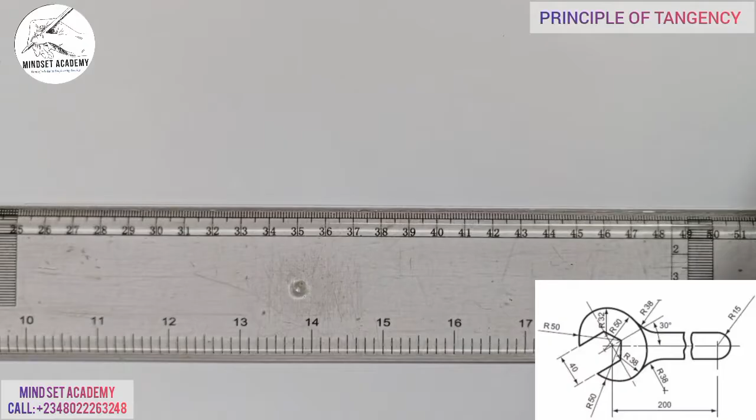Now, the first thing you do is draw your horizontal line in this manner. That is the horizontal line you've drawn.

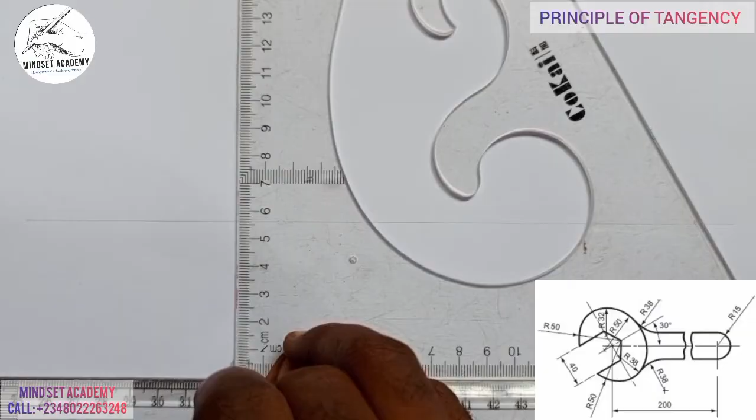And the next thing you're going to do at this end here, you draw your vertical line this way. You can see that? And they are meeting at this point.

Is that thickened? Now, doing that, you discover that this center point you see here is the center point you're seeing on the screen, right?

Now there's another line, this line you're looking at, that is inclined. It is inclined at an angle of 30 degrees to this center line. That is from here to here, given as well 30 degrees.

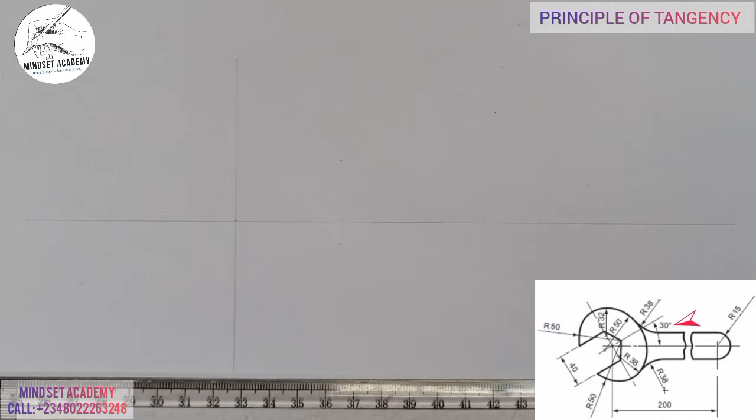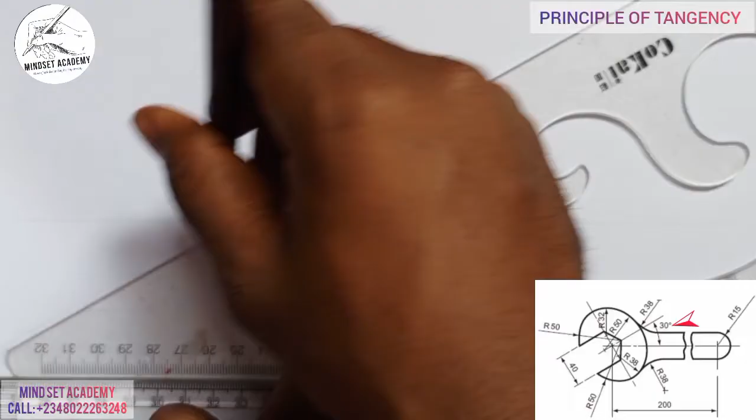And when my t-square and my set square are working together, and my set square is on the t-square in this manner, I'm going to move it because this inclined side, when the t-square is placed in this position, is 30 degrees. And I'm going to move it to that point, and draw an inclined line at an angle of 30 degrees. You can see that?

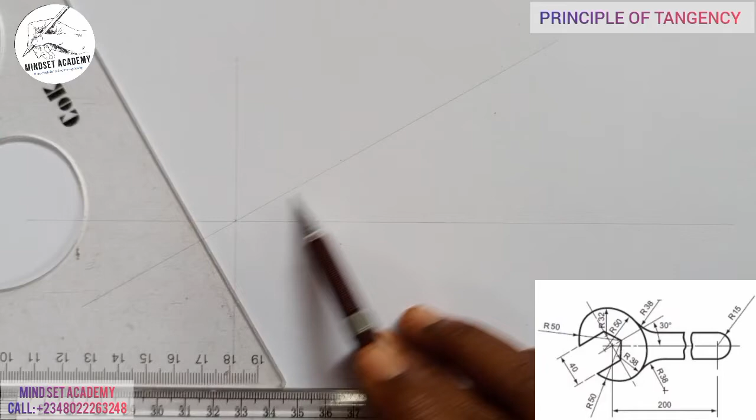Now, at this point here, you see, which will be this line connecting these 2 points here, right? I'm going to draw another line that will be forming 90 degrees with this line I have drawn. So placing it this way, I'll be having this. You can see that? So this point, like I said, is the center point you see here.

Now, why am I drawing this line? It's for me to draw this distance of 40. Is that okay now?

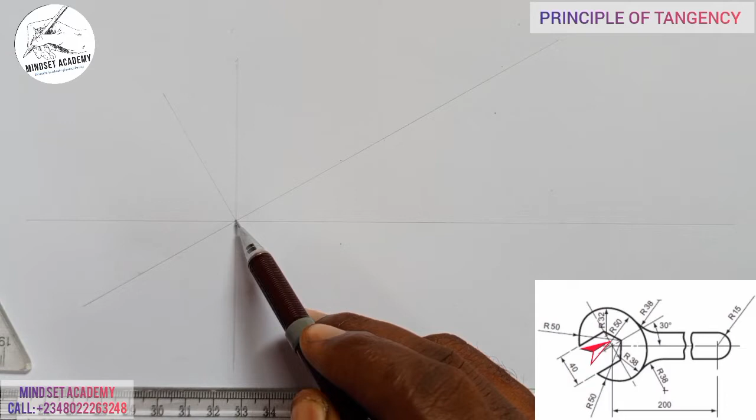So how can I draw the 40? From this center point here, which is that center point you're seeing, I'll measure to the top, which is that top you're seeing, 20, and I'll measure to the bottom, which is this part here you're seeing, 20. That will make us 40.

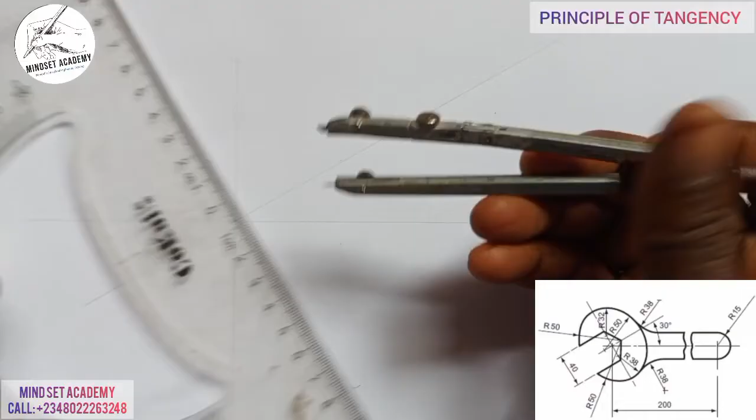So I'll take my compass or my rule, I'll place it at that point, and I just need only 20. So from 0 to here is 20. I see that? And I'll place it at this point. I'm going to mark 20 up here, and I'll mark 20 down here. You can see that? 20 up and 20 down.

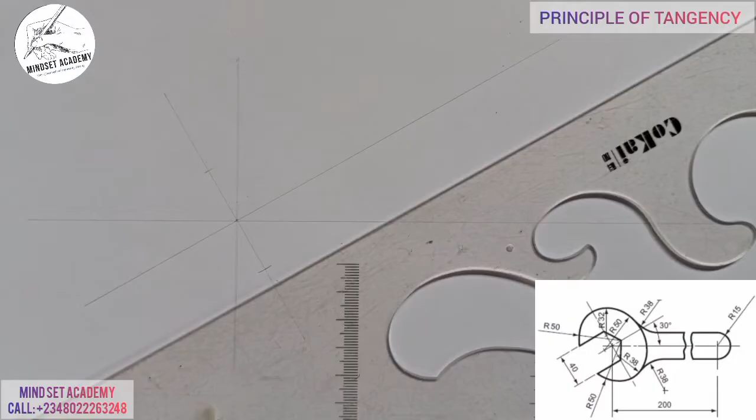So the next thing I'll do is draw a parallel line with this line here. So let me do that. I'll place my set square this way, the one I used to draw this line, right? I'll use it to draw this. So I'll put it this way to get parallel lines.

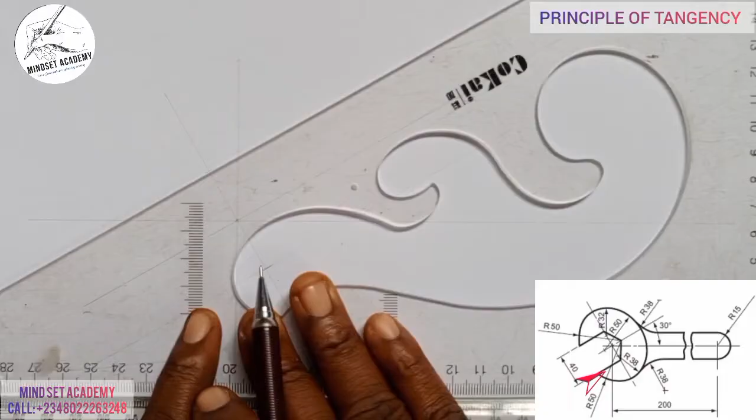I place it this way. I'll draw a line this way. I'll also come up here too. I'll do the same thing this way. Now this is what we have here.

So the next thing we are going to do here is look at this point where this top line meets this horizontal line here. This point you see is that point you're seeing on the screen, right? And there's an arc that is connected to that point, and the radius of the arc is 50 on both sides here and here.

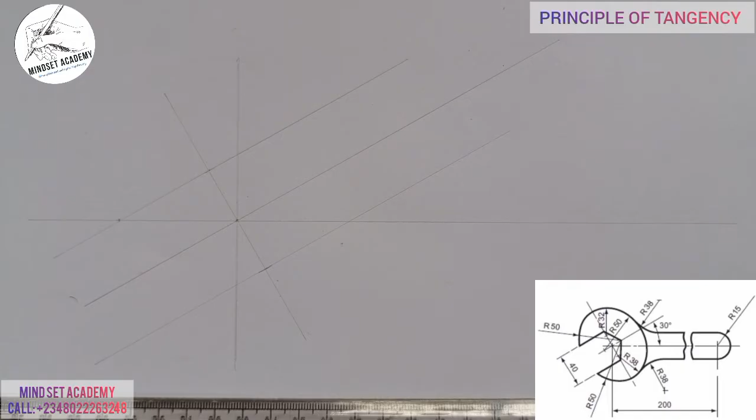So I'm going to take my compass, and I'm going to measure 50 on my meter rule. So when I take my meter rule and place it here, I'll measure 50. So from this point 0 to 5 is going to be 50. And I'll come to that point I was pointing at earlier, which is this.

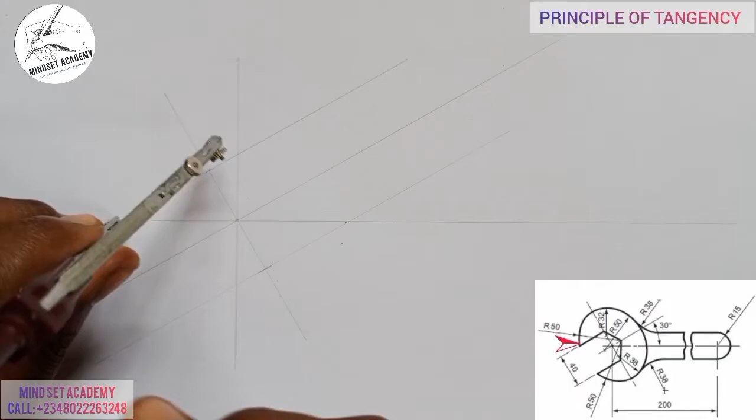And I'm going to mark an arc at this point here. You can see that. So from that arc here, on that point there, I'm going to draw a curve, a faint line, this point and also this point. You can see that. I'll use my faint line.

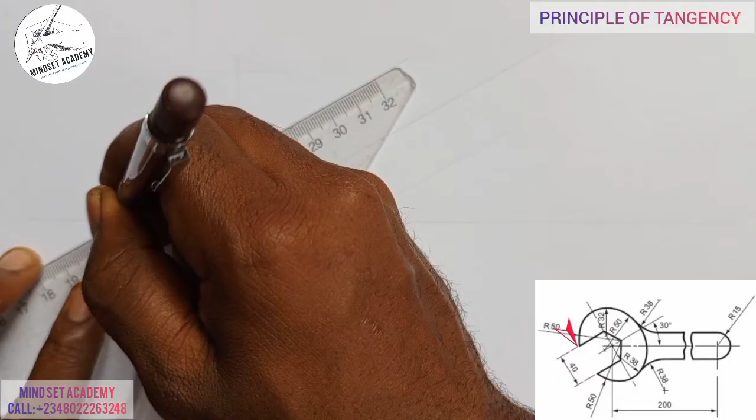So in doing that, I already know to make you understand that we are fully on track. I'm going to tick in this point here, just to give us an insight that we're actually on track, ticking from here to here, and also ticking from here to here, as shown in the diagram above.

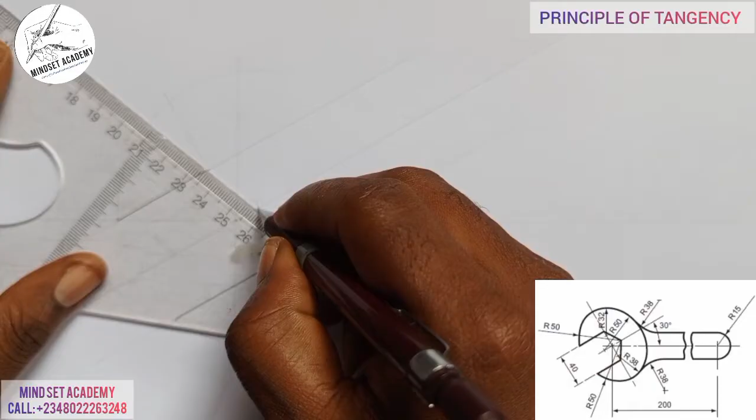That again, and also from this point to this point is this point to this point here, and from this point to this point is also this point to this point here.

So you don't use thick line until you're sure of what you're doing.

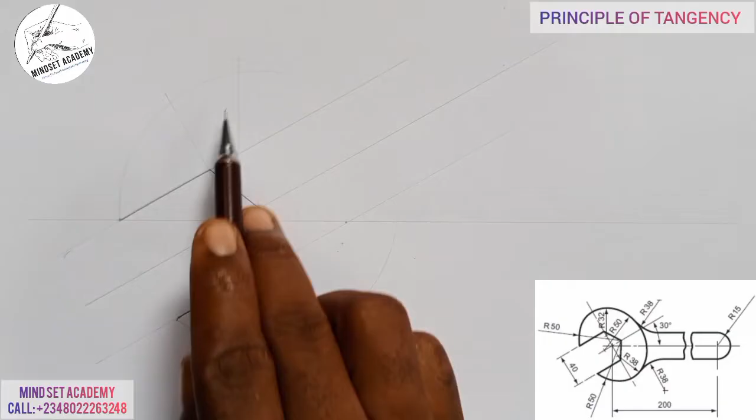The next thing I will do is there's an arc that connects these two arcs, and that arc has a radius of 50 at this side, as you can see on the screen. Look at this 50 connecting this, and also this other one with 38. So let me first do the 50 here.

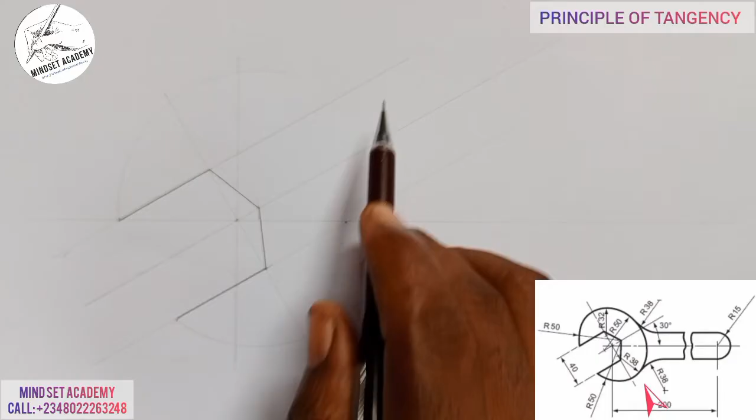Now since it is going outside, whenever the circle is coming outside, it is external. The circle will be external, so you're going to subtract. When you're subtracting, it will be the 50 minus the 32, and that's going to give us 18.

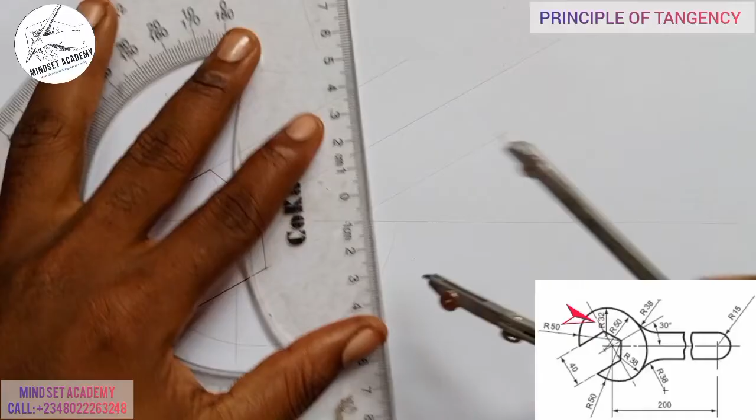So I'm going to measure 18 on my meter rule this way, from 0. This is 10 and this is 18, and I'll place it at this point and strike an arc.

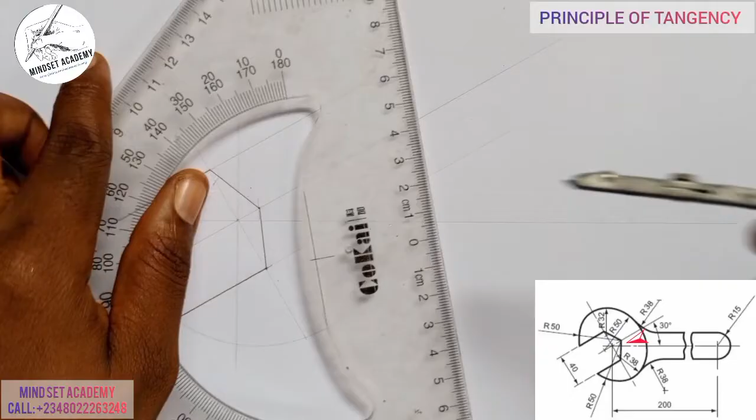Similarly, I'll measure a radius of 32. This 32 you're seeing, measure a radius of 32 on my meter rule in this manner, 30 and this 32. I'll place it at this point where it cuts this line and gauge it until I have a curve that will give me what I want. Just faint line first, you don't use thick line until you're sure of what you're doing.

Now I've done that. Then the other one too, this 50 minus the radius of 38, and that will give us 12.

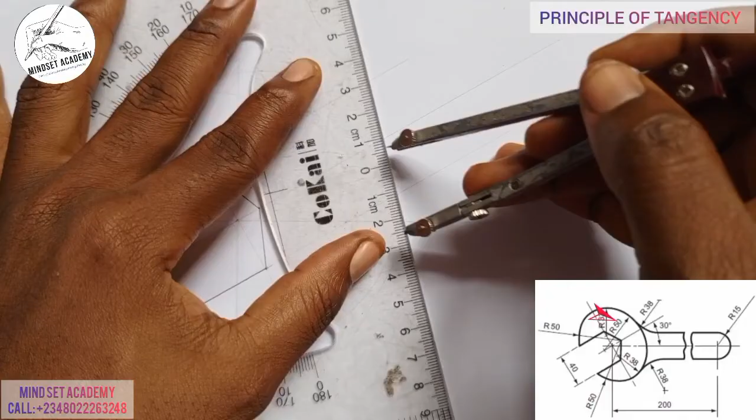So I'm going to measure 32 on my meter rule. From here to this point here is 32, and I'll place it at this point here. I'll strike my arc.

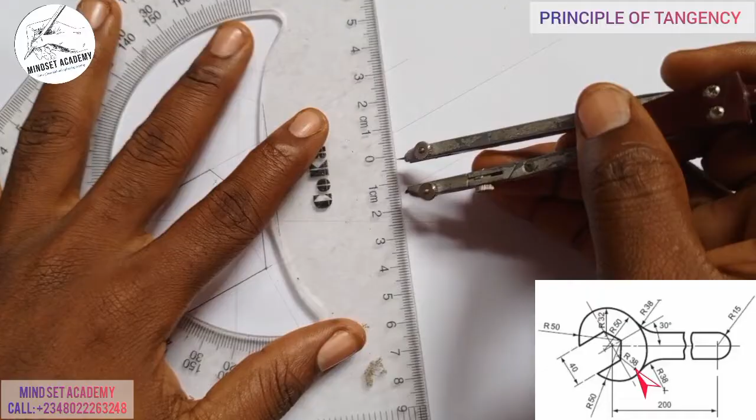So from that point, I'm going to now measure this 38, because this arc is given as 38. So I'll measure 38 on my meter rule again. From here to here is given to be 38, and I'll place it at this point where it meets, and I'm going to draw an arc.

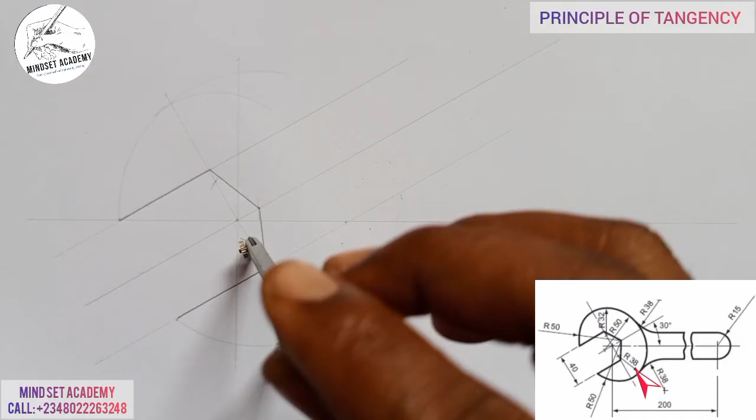I'm going to draw an arc, faint line first. Now the next thing I'm going to do is this.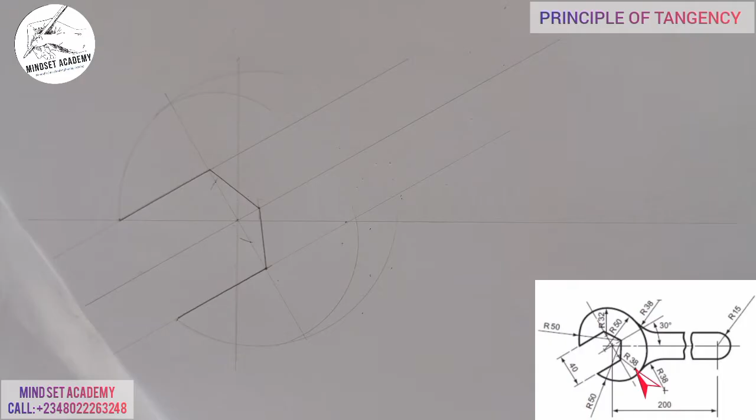I'm going to subtract 32 from this 50 here, because 50 is connected to this 32 and also 50 is connected to 38. So what I'm going to do is mark 50, subtract 32 from 50, and I'll be having 18.

I know very well that when I measured earlier on my meter rule, from this point to this point is 18. You can see that? And I'll place it at this point of 18 and strike an arc.

And I know very well that if I subtract 38 from the same 50, since it's connected to the 50 line, I'll be having 12. And I know earlier when I measured from this point to this point is 12, or you can just easily put in a meter rule. From here to here is 12. I'll place it at this point here and strike another arc.

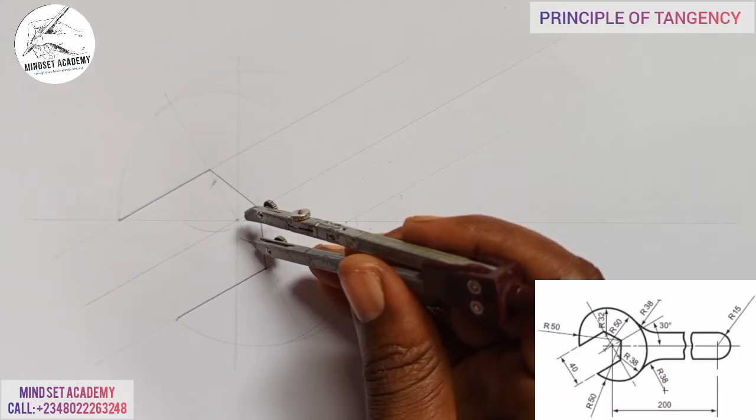So where they meet, I can easily place my compass there and gauge it to that point where they will be connected. So from this point, I can easily thicken it.

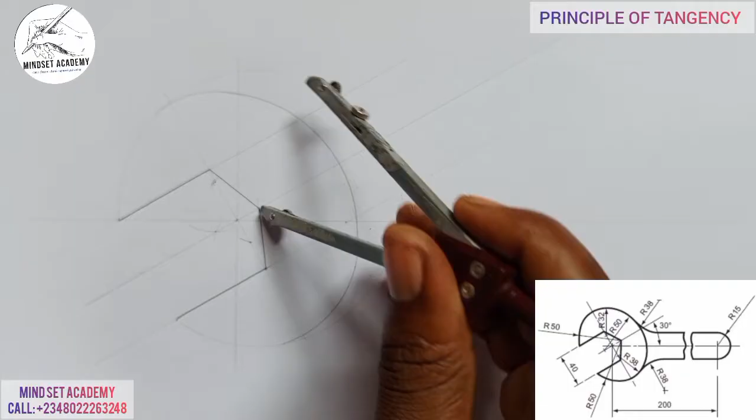And here also I'll thicken this. And here also I'll thicken this. Then this point is giving me this point of 50, which I am going to thicken, and also here too. Now, the next thing I'm going to do here is that

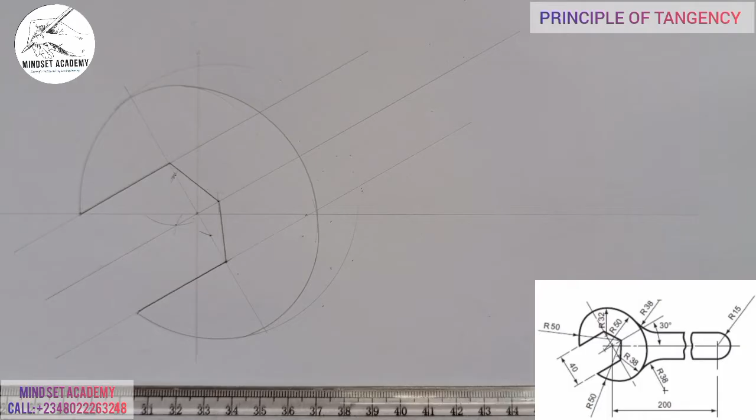I'm going to measure. If you look at this arc that we have here, it has a radius of 38 at both sides, so I'm going to measure that distance of 38. Before that, the thickness of this line here, from here to here, I'll draw a horizontal line this way, and I'm going to measure 15. So that is 30, the radius is 15, so the thickness there is 30. So I'm going to measure 15 on my meter rule.

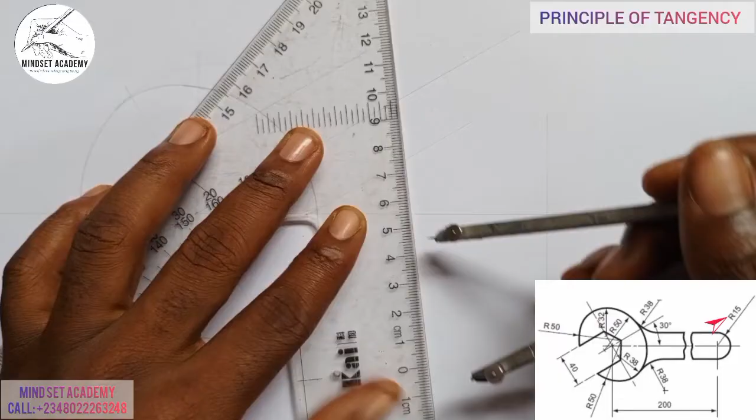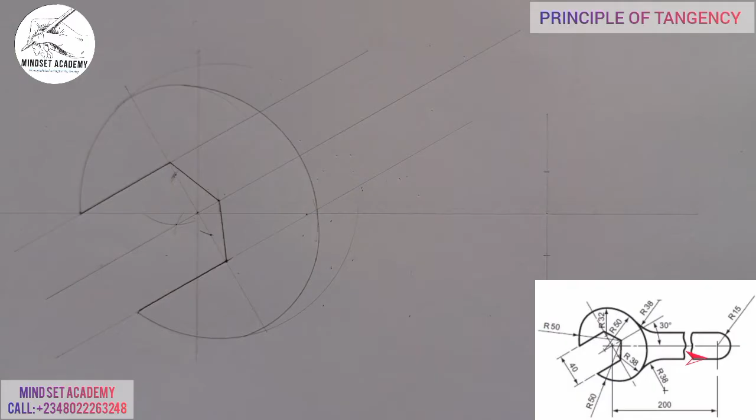I'm going to measure 15 on my meter rule this way, from 0 is 15 to this point here is 15, and I'll place it at that center line here, and I'm going to mark 15 up, 15 down. Then I'll draw my line that will be connected to this point this way. Just draw a horizontal line this way, and also do the same thing at this point here too, this way.

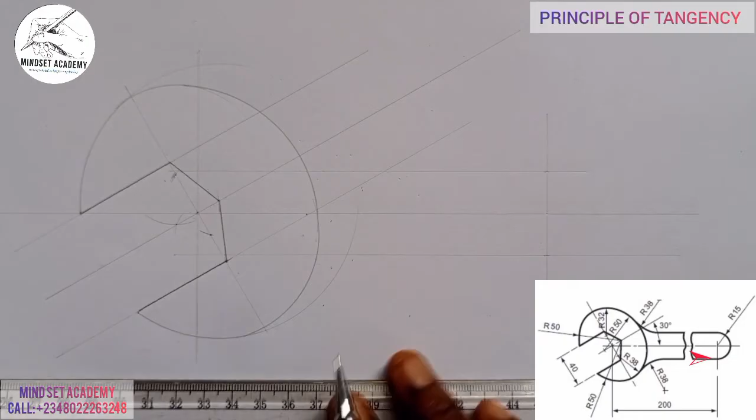Straight line. You can see that? Now we know that from here, the center point here, to where to get this arc you can see on the screen, is given to be 200.

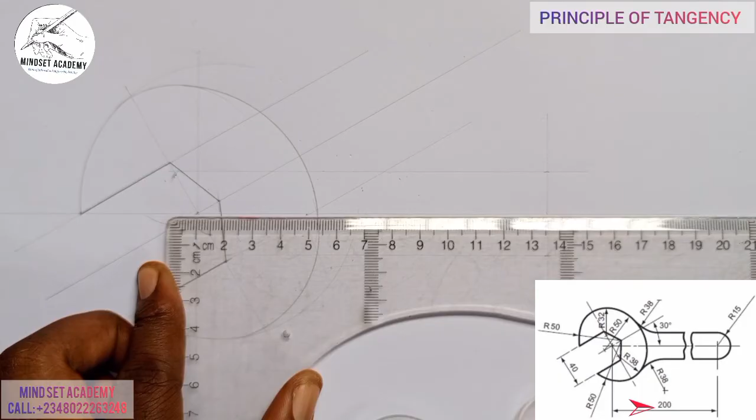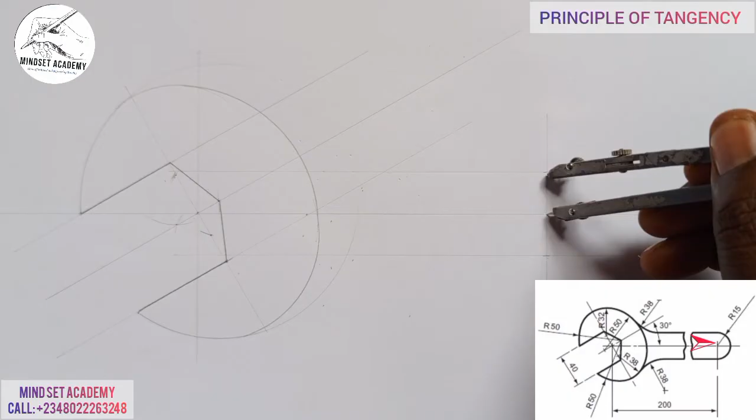So I'll measure the 200, using a bigger rule, from this point to this point. So I'm going to measure it and I'll get that point. So you measure 200 from that point to where you actually want to measure it to. Let's say from this point to this point here is given to be 200. So I'll just measure my 200 at that point from here, and I'll draw my semicircle.

See that? We are saying that from here to here is 200, from this point to this point is measured to be 200. So what I'm going to do now is get this arc here on my drawing, which will be placed around this side. Since the distance of the curve, the radius, is going to be 38, I'm going to measure 38 from this point upward.

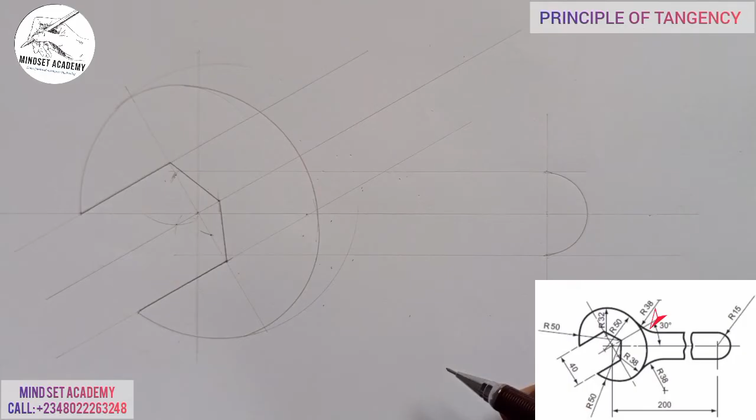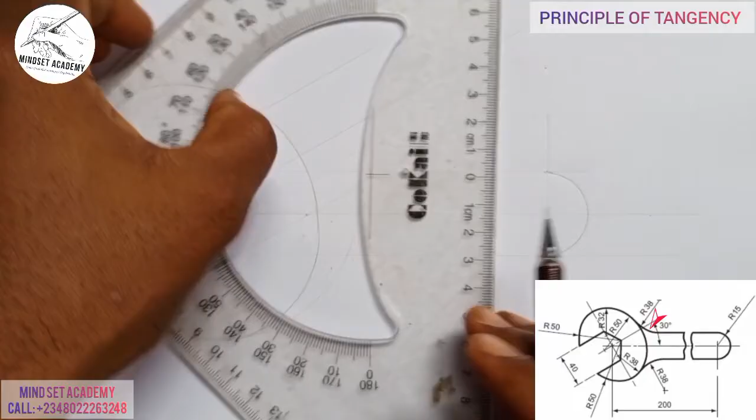Or measure 38 from this point upward, the choice is yours. So I'll take my meter rule and measure 38. From 0 here, this is 30, this is 38 here. I measure 38. So from that 38, I'll use my set square and draw a line.

And the aim of using my set square is because I want the line I'm drawing to be parallel to this line. And if you discover that this 38, the curve of this 38 is connected to the curve of this 50, is that taken? So the radius of 38, since it's going internally, the circle is going inward, meaning it is external.

So I'm going to do what? I'm going to add both of them. So taking now, I will add both of them. So in adding them, 50 plus 38 will give you 88. So I'm going to measure 88 on my meter rule this way.

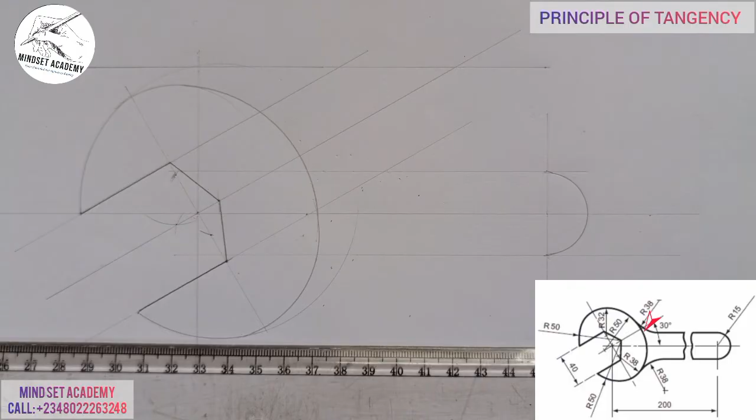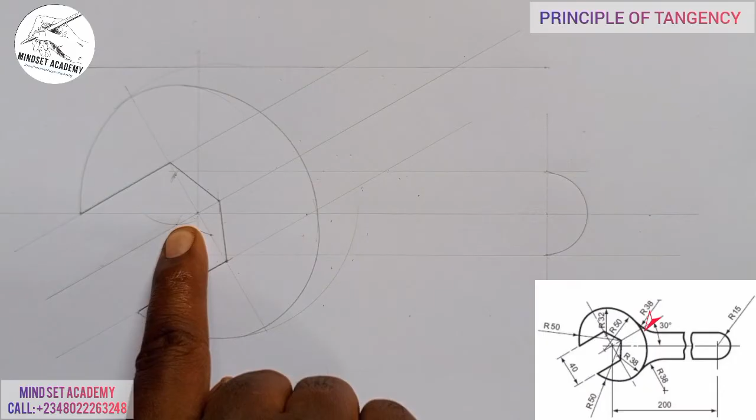I'll measure 88 from 0, 80, 88 here. Alright, so this is 88 I have. And I'll place it at the point I used to get my 50, which is this point here. Where I used to get my 50, I'll place it at that arc that I used to get my 50, this curve of 50, and this point here. So I'll place it here and cut that parallel line I drew, this parallel line here.

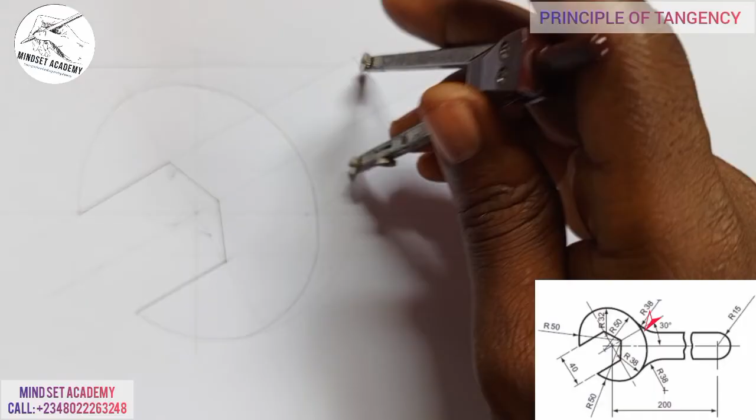You can see that? And take my compass to that point and place it on the arc and ensure that they will be touching each other. Make it more like this. So I'll just connect this point to this, from here to here.

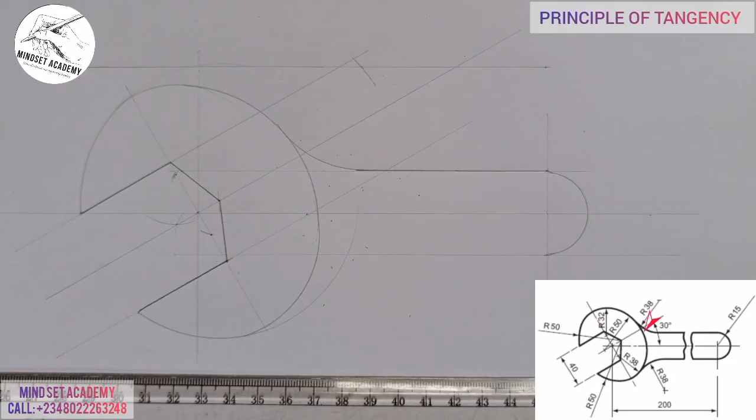You see that? Now the second one I'm going to do, the same to be applied here. The same 38 I measured here, I'll just move the point from this point here, and I'll come here and mark another 38.

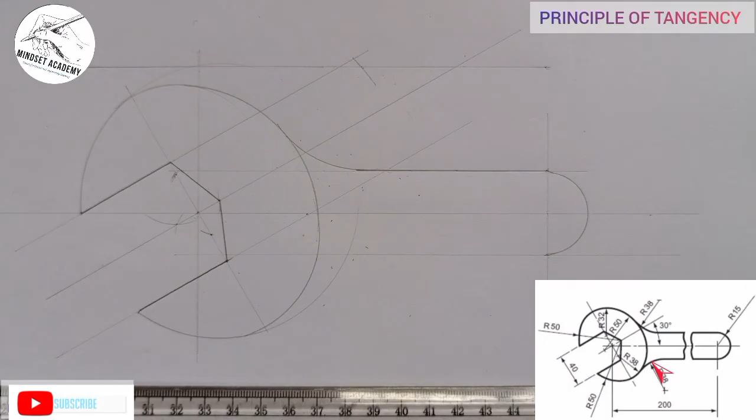Alright, so the reason is so I can draw a parallel line with the help of your t-square. You just need two points to form a straight line. You can see that? Now the same thing I'll do again.

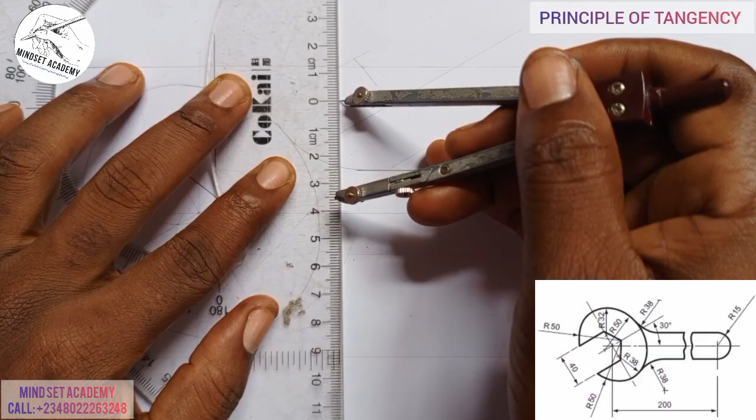The circle is going in, and whenever it's going in, you need to add the radiuses. So I'll add the radius of 38 plus 38, and that'll give me 76, because this is where they are connected to each other. So I'm going to measure 76 on my meter rule this way. 76 from here to here is 70, then 76 here. You can see that?

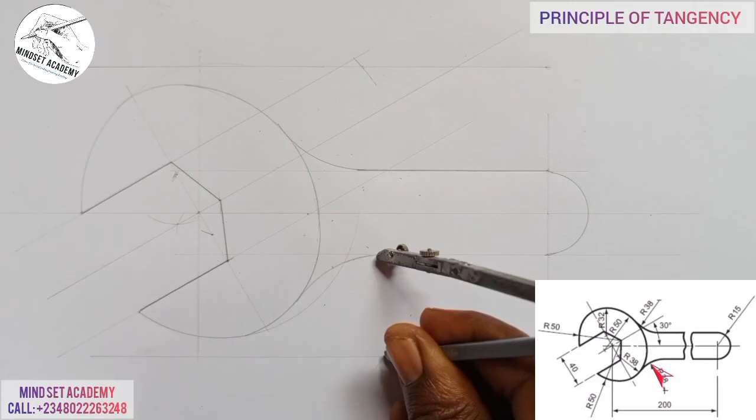So when I go to the points that form this arc here, and that point is this point here, I'll place it on that point this way. And I'm going to mark an arc. Is that the key? So from that arc, that point I marked on that straight line, I'll now get this curve that will connect these 2 points together. So I'll just connect them together.

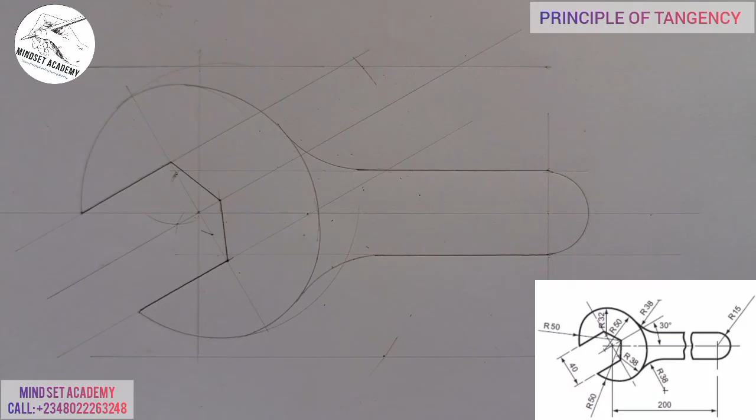You can see that. So this is the spanner that we just constructed. So the next thing we have to do is to draw our dimensioning. So this is what we have here.